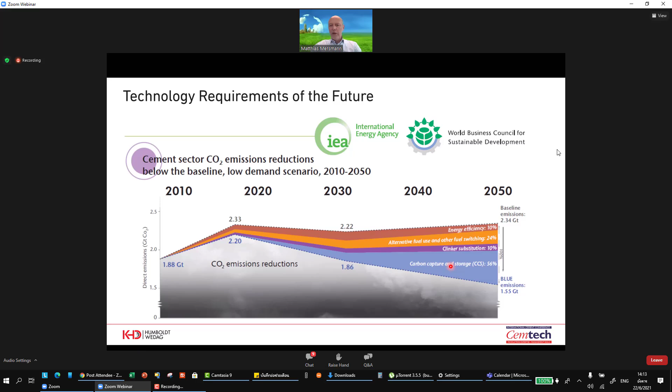To give another aspect on this subject matter, I'd like to show another interpretation from another party. The On-Field Investment Research Group has also been investigating what would be the most likely response of the multinationals in this decade. With all the multitude of technological options in hand, the question is, what are they going to do as first steps?

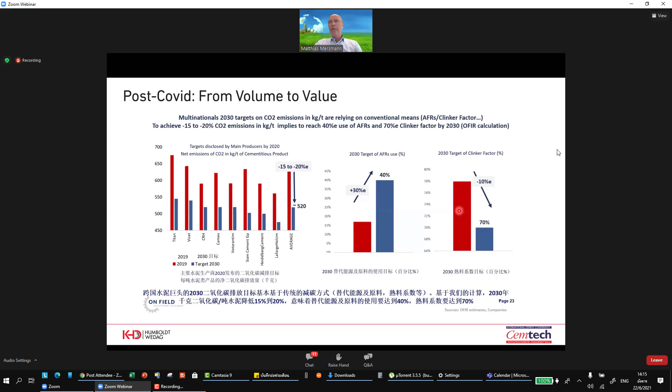The result of this group's analysis was clearly that most cement producers will focus on two things first: increasing the use of alternative fuels massively, and reducing the amount of clinker in cement. These are two very short-term achievable levers to reduce production costs and CO2 emissions. That's why I'd like to focus today on these two levers, because I believe this can be very attractive to get going towards the low carbon industry.

So my first subject will deal with alternative fuel technologies, and as I said, it is nicely scalable. Alternative fuel utilization requires, first of all, the suitable burning and firing technology. So we address subjects like burners, and as shown in this case, the kiln burner can provide a good contribution to an increased alternative fuel firing rate.

For that, the burner needs to be designed, or its design adapted, to be able to burn lumpy secondary fuels and provide enough mixing for them to be ignited. The burner design also needs to be adapted for oxygen enrichment and hydrogen enrichment, which will be coming up as alternative low carbon fuels, and also to facilitate the burnout of lumpy, hard-to-ignite fuels.

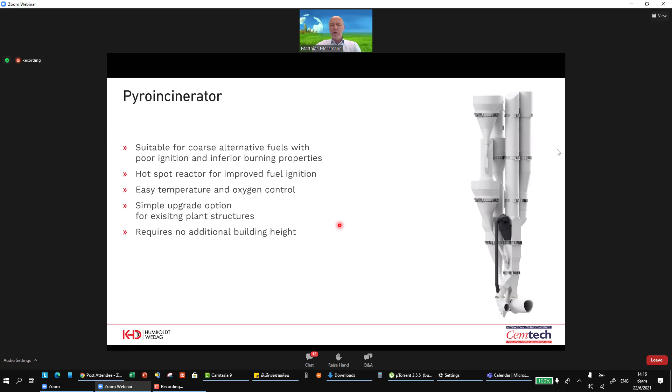What you see here is the latest design of the KHD Pyrojet burner, which can be retrofitted very easily into each and every kiln. Taking it a step further, I'd like to introduce what we call the pyro incinerator, a modular system. You see that dark gray box attached to the calciner, a modular bolt-on system to provide incineration facilitation for hard-to-ignite fuels.

You can imagine that if you start using RDF or other lumpy fuels, you need to help incineration and ignition. This is an easy flange-on, retrofittable module to increase your RDF feeding rate in the calciner.

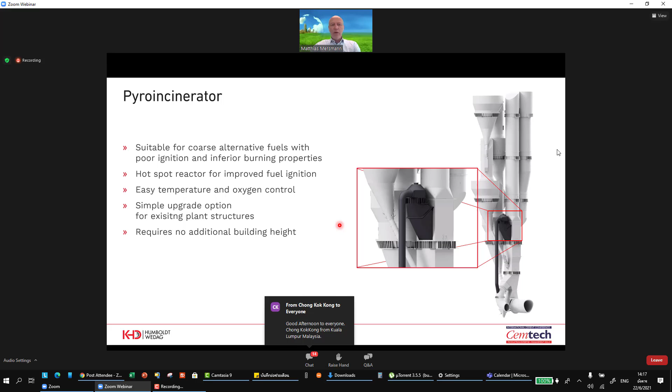Next is the well-known combustion chamber. I guess I don't have to spend much time explaining this — it's a device already commonly known in the process industry, in the cement industry. It takes the utilization of lumpy secondary fuels one step further with a dedicated burner on top of the combustion chamber, also retrofittable to a number of calciner and clinker production plants.

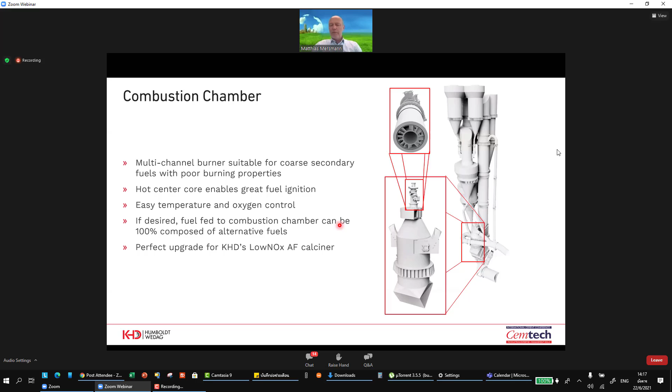What I want to put your special focus on is a new technology we developed in recent years, a system we call PyroRotor. The PyroRotor consists of a rotating kiln sitting on top of the clinker kiln, providing the most robust and most versatile type of AFR reactor available for the cement industry.

The concept of the rotating kiln comes with a lot of benefits. First, there is constant movement of the material inside the kiln, which avoids clogging and blocking. At the same time, it provides new surface for the oxidization and burnout of the secondary fuel inside the rotor. It's most robust, tried and proven, and suitable especially for material with poor burning properties, very coarse and low pre-processed fuels. Even whole tires can be burnt in this.

If we look at the CO2 aspect, we're dealing with biogenic fuels. Biogenic fuels often come with a lot of humidity, are very slow to burn, very slow to ignite, and need a long retention time. If we talk about wood, for example, retention time in this PyroRotor can be very long. The rotational speed can be adapted according to requirements, so this is a very versatile device.

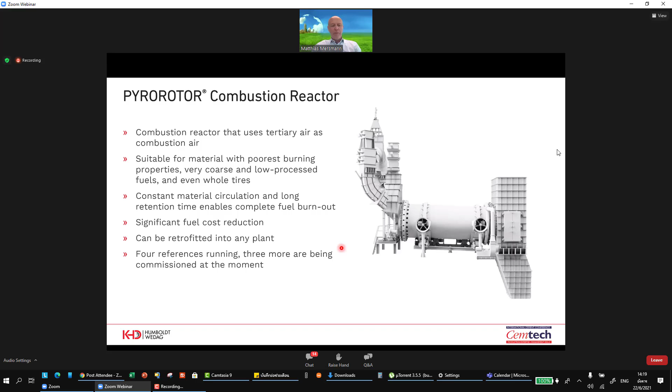Which I'd like to show you in a little animation. I hope we get this going. I hope you can see this now.

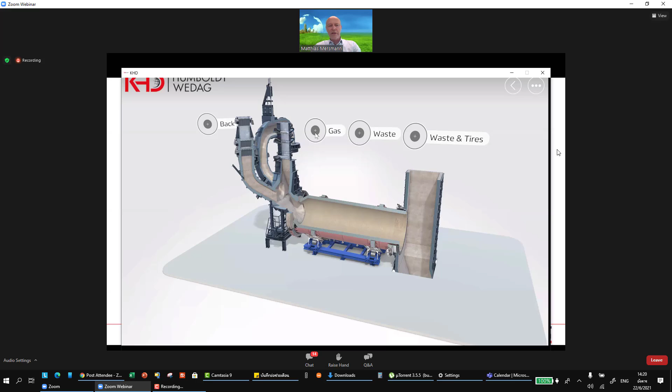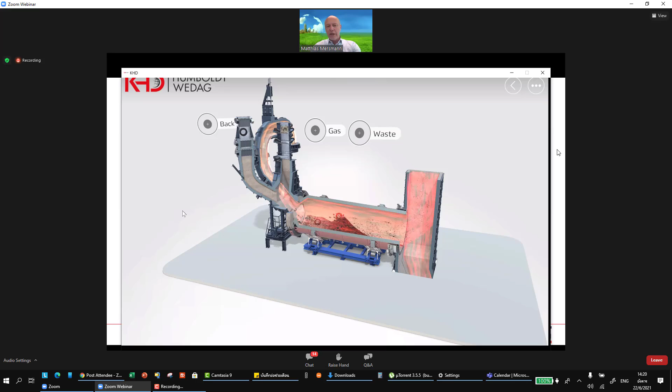You see the airflow coming from the tertiary air through the PyroRotor. And if I now start feeding material into it, you see that the alternative fuel forms a layer in the rotation, in the rotating kiln, with constant surface renewal that makes the material accessible for the combustion.

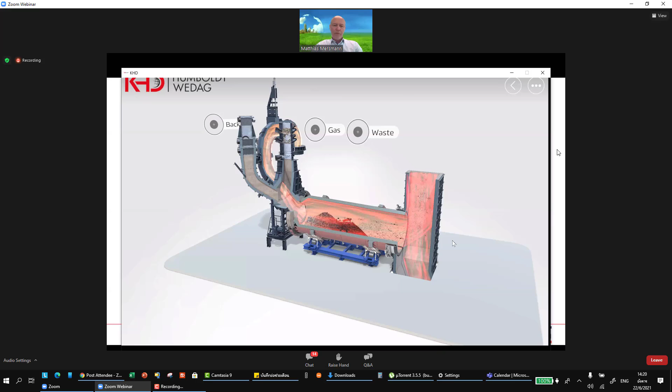And in the end, the off gases are being mixed into the calciner riser, so that in total we have a flow sheet of this system, like to be seen here.

We branch off a little bit of tertiary air guided through the PyroRotor. We can set the lambda value according to requirements. We can run the PyroRotor in reducing atmosphere, so to create also a beneficial reducing atmosphere that is reducing the kiln-produced NOx as we travel down the calciner into a mixing chamber to have the residual burnout of CO, and then come into the preheater with a totally burnt-out, NOx-reduced gas.

The amount of coarse secondary fuel to be fed into this PyroRotor is exceptionally high. We have several references installed meanwhile with substitution rates up to 100% of calciner fuel, consisting of lumpy material—I talk about 3D size, 300 millimeter rubber pieces—so very coarse material that requires only a minimum amount of pre-processing.

And that's especially interesting for regions like Asia, where there is not yet any really established scene and environment of RDF processes, so that you can take municipal waste and pre-process it only to a very minimum amount and then feed it into the PyroRotor.

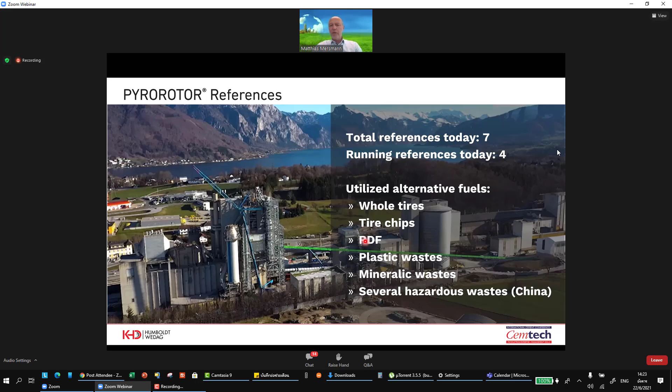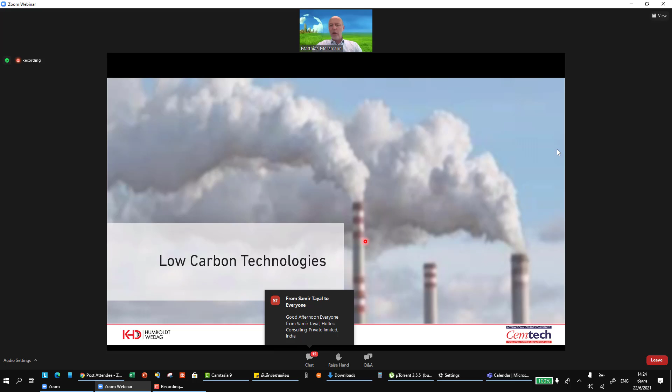Now I'd like to switch over to the so-called low carbon technologies, which is generally a subject that seems to be a little bit further away on the time arrow, but as experience tells, the large cement producing groups already run their pilot projects on these low carbon technologies. And I feel this movement towards low carbon technologies coming to us much faster even than I expected it a year ago. So we are working, like everybody in the industry I assume, already very concretely on pilot projects on various kinds of technologies for the low carbon future of the cement industry.

The two subjects I'd like to mention here in today's presentation refer to CCS and oxy-fuel plants, or I should rather say CCUS and oxy-fuel plants, which cover the subject of end-of-the-pipe carbon capture technologies, but also integrated concepts like oxy-fuel processes, which run the clinker production process without the usage of air, but recirculated or in any case oxygen-enriched gas as a combusting agent.

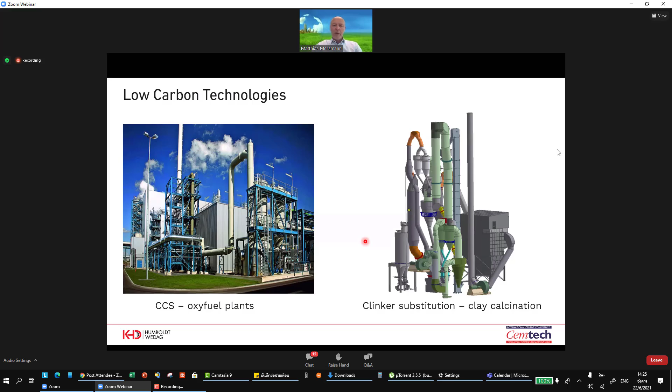And the second subject would be referring to the target of clinker substitution, and a widely used approach here is that of clay calcination. Let me start with clay calcination here with an outlook, or with a deposit map for clay.

We see that the kaolin deposits, which are necessary for using clay calcination as a technology to produce an SCM from calcined clay, are very plentiful also in the Asian region, where there are huge deposits of kaolinite, which is necessary. So that might be a very interesting technology for especially the Asian region to reduce their clinker factor and produce calcined clay and mix it into cement.

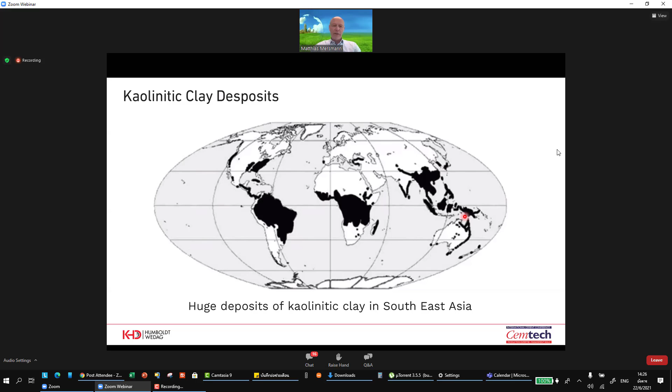And for this reason, we have developed technology for clay calcination, which I'd like to briefly introduce to you.

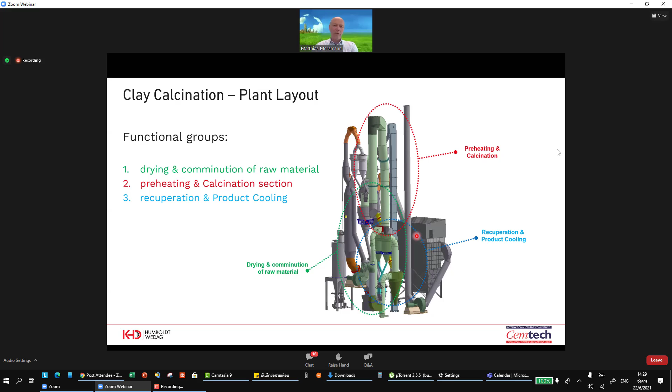As a special feature, we have developed a specific two-stage process with optimized oxygen staging, which provides for color control and optimized heat utilization. This is necessary because if you don't control the oxygen content during the calcination, you will have a non-gray product, and in the cement industry we just like the color gray. With this it's possible to control the oxygen content and with that to control the color.

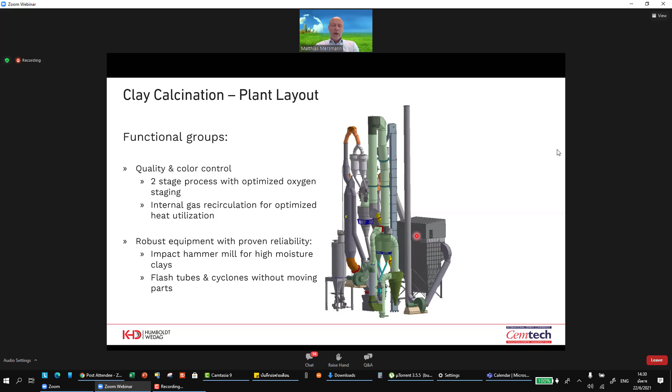As the last point of technology I'd like to mention today, I'd like to give a little bit of information on CCUS and oxy-fuel plants. I guess the subject of carbon capture as a bolt-on, end-of-the-pipe amine scrubbing technology is well known to everybody. It's something you just flange on at the end of the process. A well-known technology that is already available.

What is more interesting, because it's more energy efficient and because it's reducing costs also on the carbon capture side, is to run cement plants as oxy-fuel plants. Oxy-fuel means that you don't use air for the combustion, but you use an oxygen-enriched gas.

I guess we're going to hear from ThyssenKrupp already about their proposal on their oxy-fuel process as well. But what I'm showing here is something like a classical, very flexible oxy-fuel flow sheet.

You see the preheater and the precalciner, the rotary kiln and the cooler as the core of the clinker production process. And what's different from a regular process is that you take the off gas of the preheater, do some energy recovery, but in the end recycle it and bring it back into the cooler and add some oxygen to it.

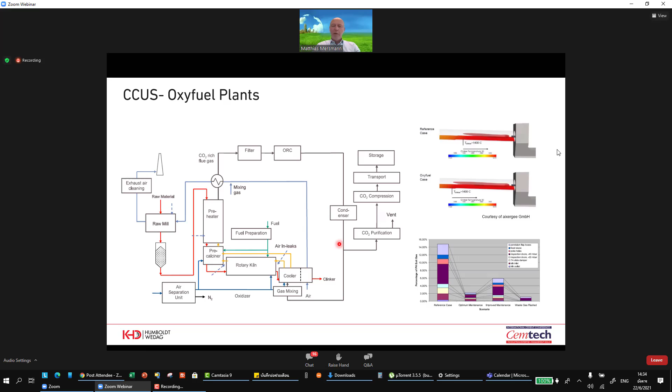during this very interesting period of time that's coming up to us so rapidly. I think we have to get all our brains together, everybody, and cooperate across the sectors and across the desks in order to manage to respond correctly to this requirement, to this challenge. So let's get things done together. We will be happy to cooperate with you.

Thank you very much, Matthias.

That's a really interesting presentation. You've kind of touched all the main themes there. We've looked at alternative fuels, the clinker substitution, and now the CCUS, as you say. There's so much technological development now. Some of it's in really quite early development, and some of it is literally on the cusp of being installed for the first time in cement plants.

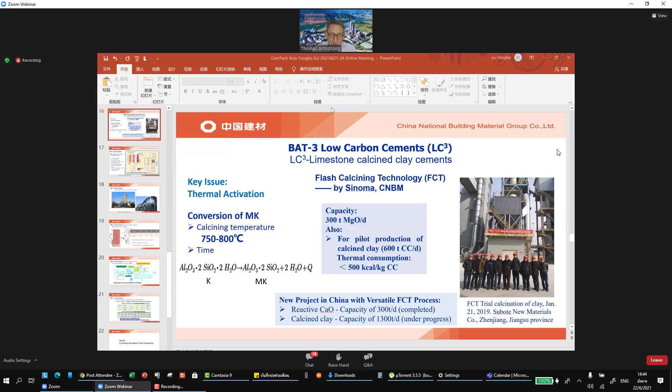Thank you, Thomas. Thank you for the kind introduction. Good morning, good afternoon, colleagues. I really appreciate the conference organizer inviting me to attend this important conference. I'm not quite sure if the slides are good or not.

Yeah, we can see them, but if you would like to put it into presentation mode, in the bottom right you could press the icon which will show the slides. Just a moment, sorry. We can see them.

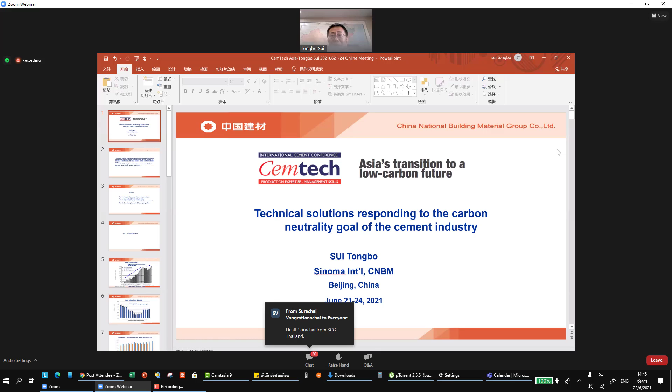Today I'm very happy to share with you the technical solutions responding to the carbon neutrality goal of the Chinese cement industry. This is also the effort of the Chinese cement industry to respond to the statement our President Xi Jinping made last year in September, that we aim to have CO2 emissions peak before 2030 and achieve carbon neutrality before 2060.

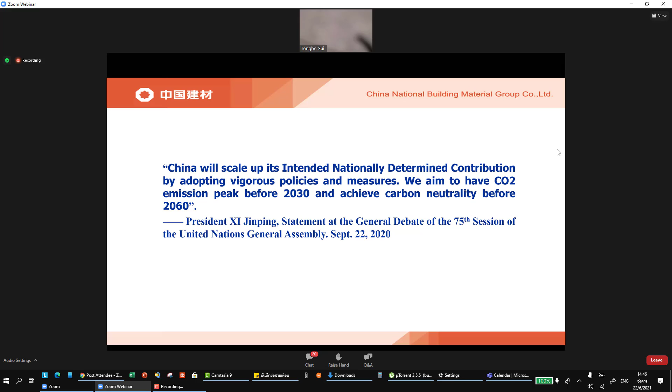Today my presentation will mainly include three parts. First, a quick review of the current situation of the Chinese cement industry. As we know, China is producing more than half of the cement in the world. We have seen, in the last 50 years, a dynamic increase of Chinese cement production.

The highest production output actually happened in 2014. Then the cement industry of China experienced a steady decrease, though there's some up and down, but we have seen that we are now in the phase of decreasing production amount.

But even so, when we look at the figures of per capita yearly consumption of cement, we are still very high, 1.66 tons per capita. Also, in terms of CO2 emissions from the cement industry, we account for around 13% of CO2 emissions in China.

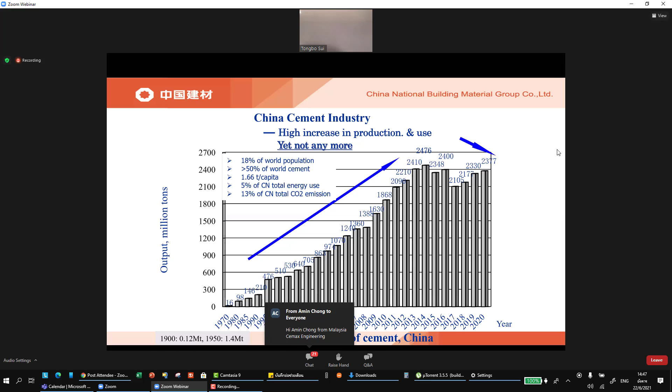Another characteristic of Chinese cement is the higher ratio of clinker substitution. Clinker substitution can give an immediate effect for CO2 emission mitigation. We have seen the lowest clinker factor of Chinese cement around 2014, and in the recent 3-4 years there's been a little increase in the clinker factor in Chinese cement.

But that doesn't mean we use more clinker in the concrete. What we don't use in cement production, we can also use for concrete. So it's more or less the same effect in terms of CO2 emission per cubic meter of concrete.

We know that CO2 emission, especially direct CO2 emission, is closely associated with clinker output. Here it shows the diagram of the Chinese cement industry for clinker output and direct CO2 emission. We have seen a little increase in recent years, more or less 1.3 billion metric tons of direct CO2 emission from Chinese cement. That's a huge amount, and a huge challenge for the Chinese cement industry in the future, especially regarding carbon neutrality by 2050 up to 2060.

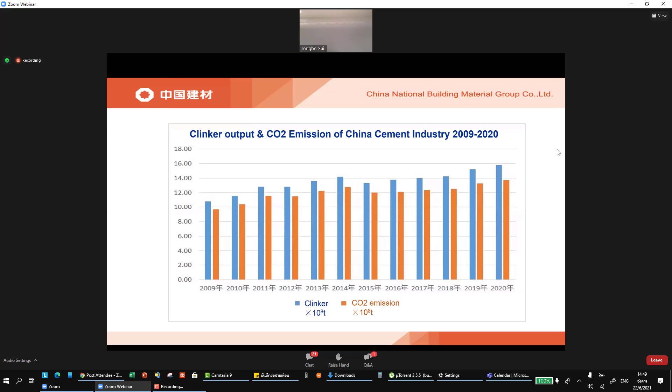In the second part, I will give you some examples of best available technologies and emerging technologies in China contributing to cement sustainability and carbon neutrality.

Following the same principle of the technical roadmap for low carbon cement launched by the IEA and the former CSI, we have best available technologies in China for continuous improvement of energy efficiency, thermal energy efficiency, as well as power efficiency. We also have more than 80% of Chinese facilities equipped with waste heat recovery systems.

The second part covers best available technology for alternative fuels and raw materials. Mostly we focus on co-processing different wastes, for example municipal solid waste, hazardous waste, and sewage sludge. So far we have equipped close to 100 facilities to deal with these different wastes. Unfortunately, the percentage of co-processing using alternative fuels is very low, around 2%.

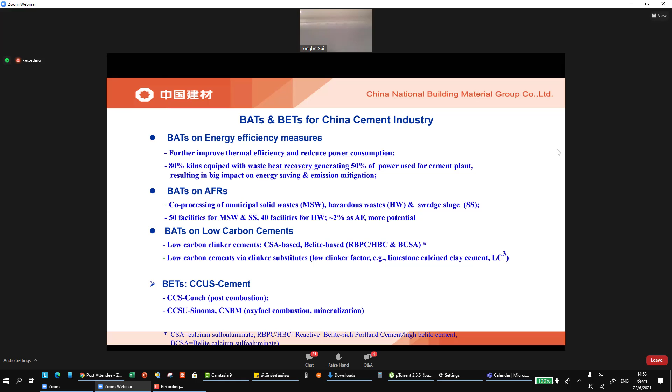The first example I wish to present is the demonstration project with AI-aided modern manufacturing technology. The project is located near Hangzhou, at CNBM cement. It's a new dry process with 6-stage facilities, capacity of 7,500 tons per day, generating 30 kilowatt hours from the waste heat recovery power generation system per ton of clinker. With the modification of the AI system, we built the cement facilities with less than 65 staff, and achieved a number of advanced KPIs, for example thermal consumption, power consumption, and also pollution control parameters are very good.

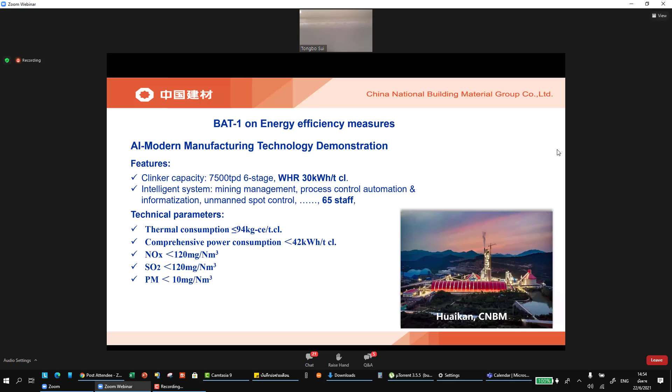A second example I want to give is for co-processing. This shows the first co-processing project we did in China, by Sinoma, in Liyang City, with a population of less than 1 million. With this system, we co-process 450 tons of municipal solid waste and 120 tons of sewage sludge per day, and 20 kilotons of hazardous waste per year, combined with a 5,000 ton clinker line. Considerable economic, social, and environmental benefits can be achieved by this co-processing system. The most important thing is that with this co-processing facility, Liyang City actually becomes a city with zero municipal solid waste. In recent years, this has become a trend, a new mode for combining cement co-processing facilities with zero waste cities. We have quite a few projects already completed in China with this combination.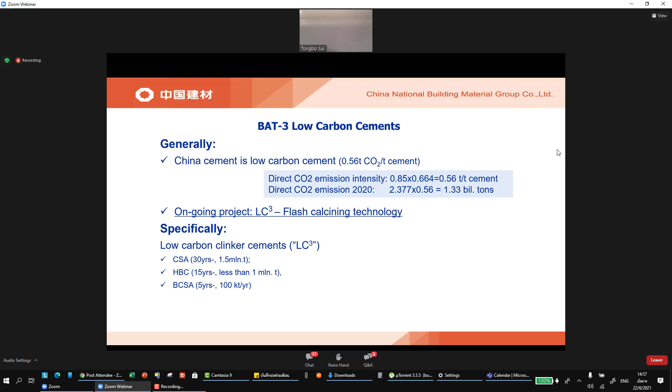Specifically with Chinese characteristics, as I already mentioned, we have developed and utilized low carbon clinker cement with CSA or belite as principal minerals. I believe this kind of low carbon clinker cement will also be a very good alternative in the future, as an innovative material solution for the future cement industry.

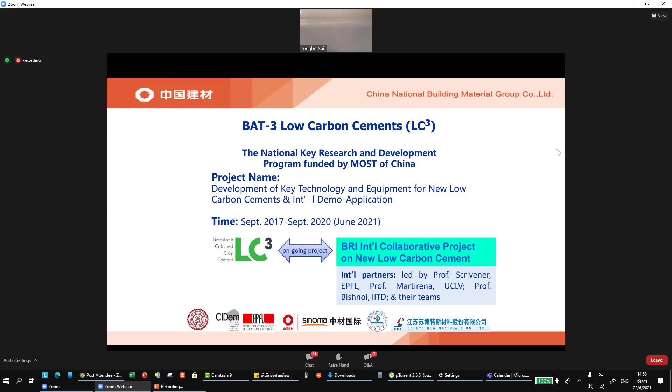I also wish to say a few words about the national project we are doing now in China, supported by the Ministry of Science and Technology of China. The project is an international collaborative project. We appreciate the international partners, led by Professor Karen Scrivener from EPFL, Professor Martirena from Cuba, and Professor Bishnoi from India. With this collaboration, we have 6 partners working on this new low carbon cement, focusing on using calcined clay. This is the new type of low carbon cement we are working on.

We expect this low carbon cement can use a 50% clinker factor. But even with 45% clinker replacement, we expect to achieve equivalent 28-day strength compared with pure Portland cement, without any addition of blending materials. The new low carbon cement can also exhibit excellent durability.

The second important milestone for this project is to develop suspension calcination technology, a kind of flash calcining system. We expect this system to produce calcined clay more energy efficiently. We have also demonstrated the project outcome through trial production of calcined clay, with 600 tons per day of calcined clay in the system.

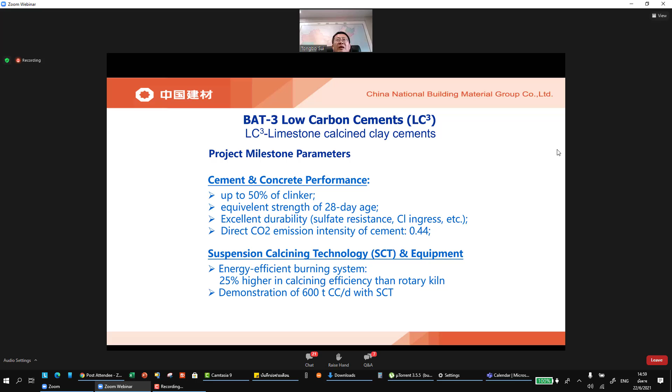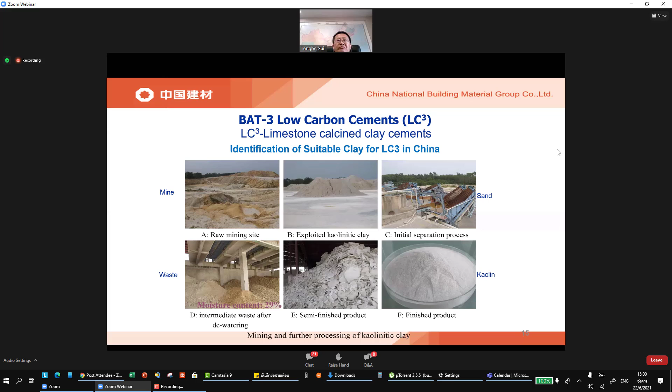The raw material we identified in China is a kind of intermediate waste from the beneficiation process of kaolinite in southern China, where a lot of such silicate-rich soft kaolinite clay can be found. The key issue for LC3 is to thermally activate the clay. The best performance is given by kaolinite-bearing clay raw materials, with calcination temperature around 700 up to 800 degrees, depending on the time and the kaolinite content.

Research shows that 40% kaolinite content in raw clay is good enough for producing high quality, low clinker factor, low carbon cement. Certainly, the higher the kaolinite content, the better the performance, and the larger the replacement of clinker for production of low carbon cement.

We successfully made a trial production of kaolinite clay using the flash calcining system we designed for our Chinese client, Sobute New Materials Company, in Zhenjiang, Jiangsu province. We made this trial production two years ago.

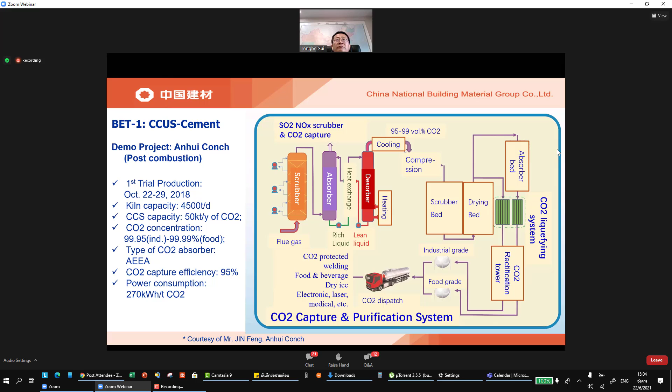So we see the flow diagram of the post-combustion system for the Anhui Conch demonstration project. We also show two pictures of CCUS projects at Anhui Conch cement.

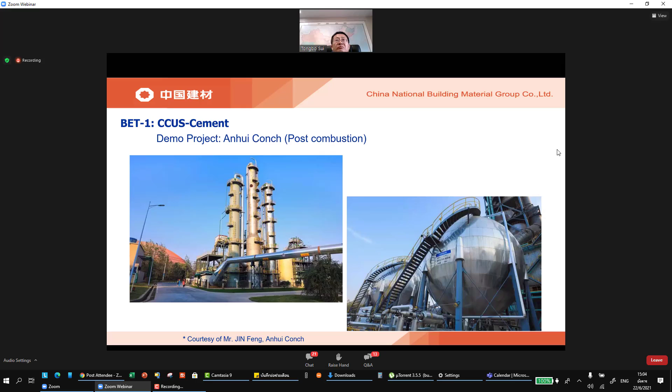For the second CCUS, in China, Sinoma also developed the oxy-fuel and CO2 enrichment process for CCUS technology. With this oxy-fuel process, we expect to concentrate CO2 from normally 20-30% up to 70-75%.

With the enrichment of CO2, we expect to considerably reduce the capex and opex of the CCUS system. Another important point is that with CO2 enrichment up to 75% concentration, we can use the CO2 enriched gas directly for carbonation curing to produce carbon cured products. With that, we can reduce the cost remarkably.

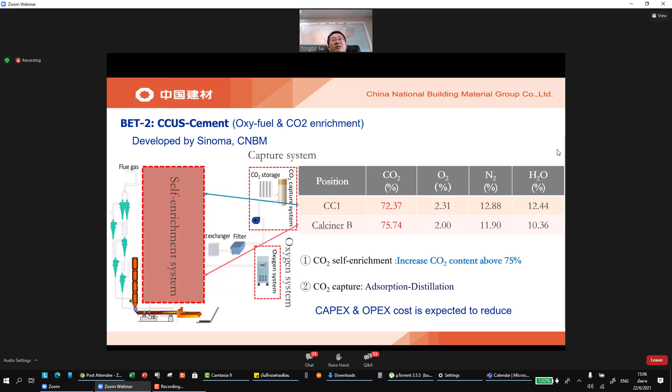Here's a flow chart of the oxy-fuel combustion system Sinoma developed. We already finished the 50,000 tons per year pilot project. We are expecting to work with interested industry partners, cement partners, on the oxy-fuel combustion project.

We are also involved in CCU, utilization through the mineralization sequestration process. The concept is very simple: we try to use two types of waste, CO2 from flue gas and carbide slag, also a kind of waste from the chemical industry, to produce the high value added product PCC.

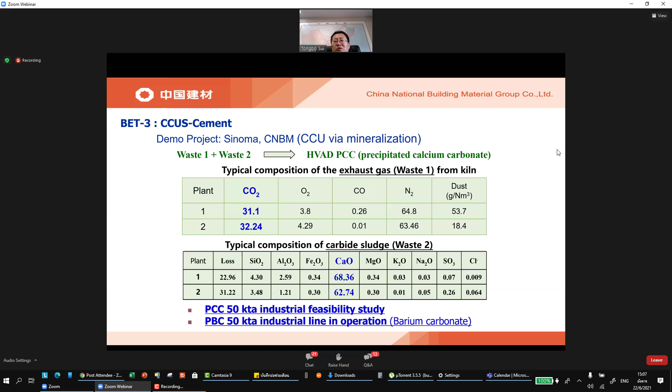Precipitated calcium carbonate - we already finished the feasibility study for the 50,000 tons per year PCC, and we also completed the industrial project to produce precipitated barium carbonate with the same capacity, 50,000 tons per year. Though this mineralization process capacity for using CO2 is very small, only 50,000 tons per year, I believe this is a very important step to take action from now.

Finally, a few words about the future perspective. In terms of cement sustainability and carbon neutrality, this is a global issue but has to be dealt with regionally. We rely on all aspects to contribute to this sustainability and neutrality. There's no silver bullet - we have to equip ourselves with different tools in our toolbox to respond to sustainability and carbon neutrality in the future. CCUS is certainly one of the key solutions for carbon neutrality.

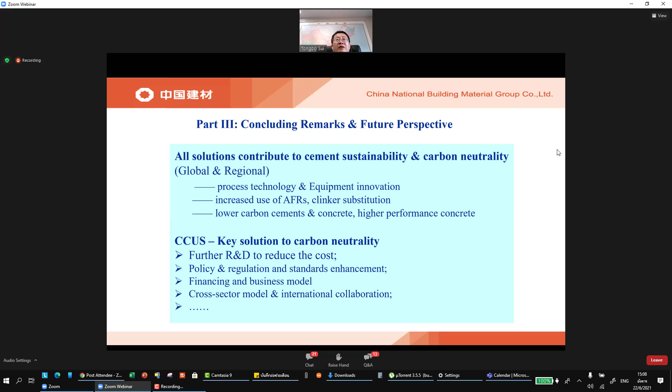With that, we expect further R&D to reduce considerably the cost for capex and opex. We also need support from policy regulation enforcement, standardization, financing, and cross-border, cross-sector business models, and international collaboration. I also wish to use a slide that I prepared 10 years ago.

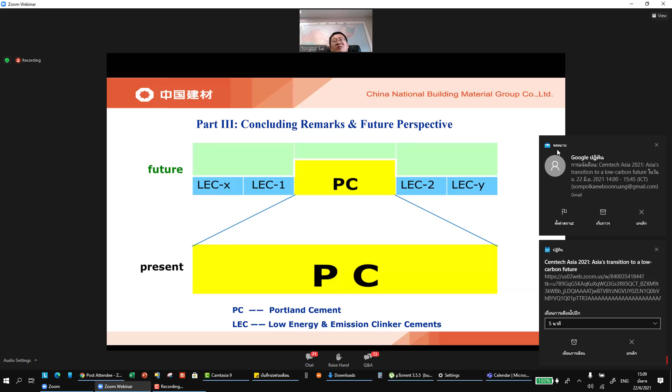I believe that's the scenario in the future for cement as a binder - to change the present Portland cement as a single material, and produce more low energy emission clinker cement combined with the main dish, the Portland cement, in the future. That's my short review of the Chinese solution in responding to carbon neutrality.

Thank you very much. Thank you very much.

That was a fascinating presentation, interesting to see the alternative fuel solutions, calcined clays, carbon capture, different technological approaches in different environments. In China, the scale of the industry is immense - as you mentioned, over half the world's cement production.

With these technologies now developed but still at an early stage, how fast do you think they can be adopted by the cement industry in China? Are the drivers there to push this technological deployment? I'm thinking about the 5-year plan and peak carbon as one of the targets - do you think that's going to push this technology quite fast? Thinking back 15 years ago in China, the vertical shaft kiln was still the dominant form of manufacturing, and now it's completely eliminated. We know how fast China can move - do you see the same progression for these low carbon technologies?

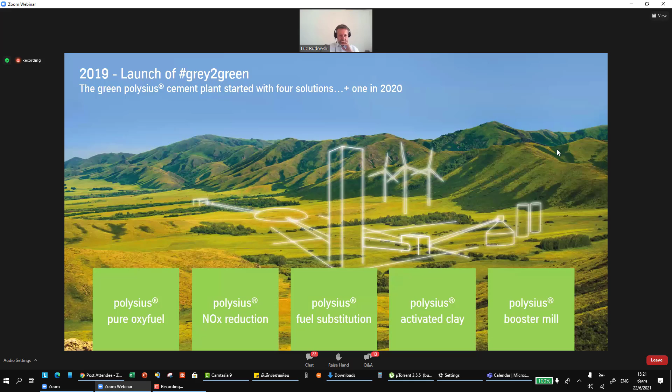Let's start with the fuel substitution. I think most of the previous speakers talked about what is, until 2030, the win-win solution. Most of it's related to win-win because it's not increasing the cost of the cement that is produced, but on the contrary, the cement producer can reduce their production costs and earn money with a very rapid return on investment using waste fuel, alternative fuel, as well as clinker substitution. So let's start with the fuel substitution.

We developed this combustion chamber, the so-called Prepol SC, and the short version of it, the Prepol SCS. We have had a lot of references on that for years. Basically, that's a completely static combustion chamber where, on the Prepol SC, you have a tertiary air duct as well as a meal, in order to have a complete combustion of ultra coarse fuels or very low reactivity fuels, aiming at a complete substitution in the calciner. Basically, the two systems use the same feeding system here.

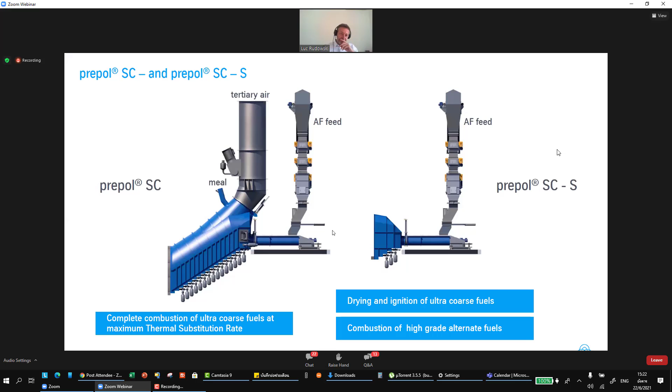The difference with the Prepol SC is the size of the combustion chamber, which is used to dry and ignite the coarse fuel. It's not completely burning, but it's creating a lot of volatile matter that will then continue to burn into the calciner. This is a perfect entry product to start burning alternative fuel.

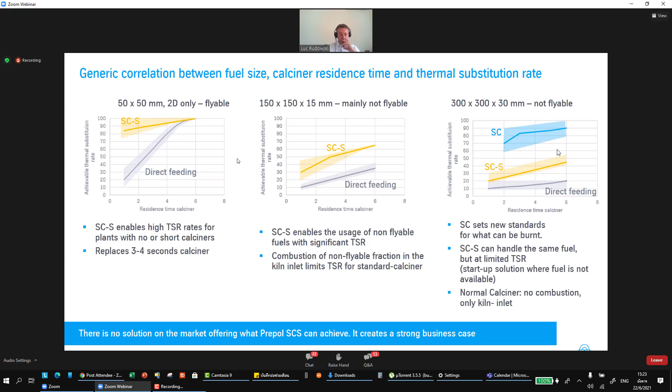Going to larger pieces of alternative fuel, you can go to the SC combustor. So with these two solutions, we have the complete range of possible substitution rates with any kind of size of alternative fuel.

The SCS has been commissioned last year, very quickly and successfully, in Cementos Artigas in Uruguay, leading to a 25% TSR over the Prepol SC. The nickname in South America has already been launched by the client - the so-called Prepolito. There they are burning shredded tires.

And we just commissioned the second one in Turkey, on the separate line calciner, which is quite interesting because it's not that easy to burn alternative fuel in a separate line calciner. So this product is having a great start on the market.

Here is a major reference that we are implementing presently for TPI Polene in Thailand, where the client has 4 9,000 tons per day plant, and we are converting the 4 kilns with Prepol SC, leading to the biggest waste incineration plant in a cement plant.

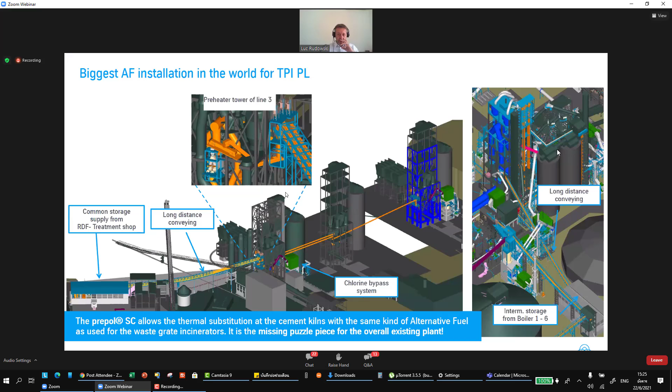Together with the chlorine bypass system as well, so we developed the waste to energy solution for household waste. Yesterday we had the presentation of Cemtech, so I guess that's really a good continuation in terms of technology proposal to solve the problem of household waste and plastic - from the collection, sorting, treatment, and burning that in our combustion chamber, Prepol SC or Prepol SCS.

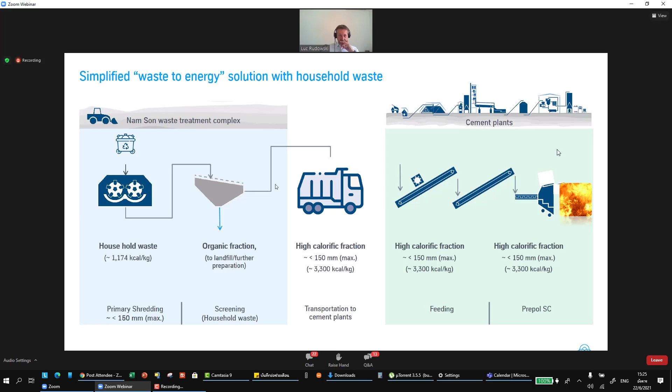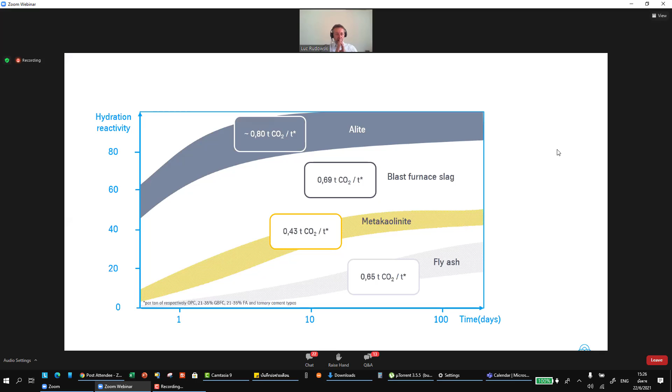Clinker factor reduction: in fact we are combining here two technologies, because we believe, as it was presented by Paul Roger from Exxon yesterday, that with decarbonated clinker and LC3 type cement, that is the best combination we can have in the future in terms of production cost of clinker. We believe as well that the clinker will remain, and the graph here is to explain why.

Even if the challenge of the alite here - representing the clinker - is that it's emitting the highest amount of CO2 and is most energy demanding when compared to a possible alternative like blast furnace slag or fly ash, which everybody knows has less resource available. Metakaolinite is an option, definitely, but still the alite is showing the strongest hydration and reactivity over time.

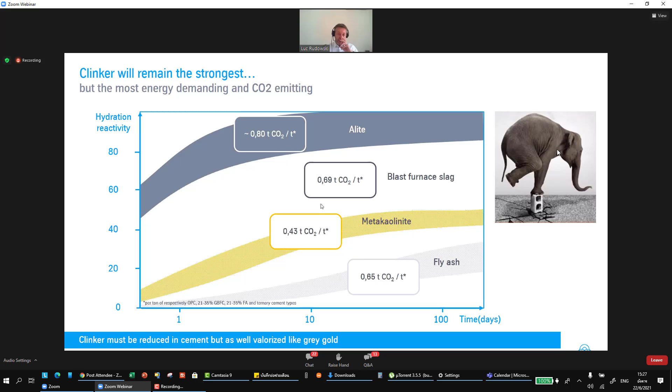So that means the consequence is that we will have to reduce the clinker, but the remaining portion of clinker in cement will have to be valorized. I use this term of gray gold because it will remain in the cement industry. So our proposal, in fact, is to combine both technologies here.

First of all, what we call the Polysius activated clay, which is a flash calciner producing activated clay as a substitute for reactivity from the clinker. And on the other side, to optimize the reactivity of the remaining part of the clinker, which can be used either to push further the clinker reduction factor when using activated clay, or to add more filler if we are talking about limestone additive there.

So in fact, it's the compensation of the missing clinker reactivity by activated clay that we know at the early ages as well - I mean the booster mill here can offer definitely earlier compensated strengths with finer clinker grinding.

Let me explain a bit the principle of the technology. I will not enter into very detail because I would like to cover all possible topics that we are developing, and we have a lot under development in our portfolio right now.

So I'm presenting here the flash calciner. I think that's quite an industry, becoming an industry standard.

I have still a lot of questions about rotary kiln. For sure, there are some rotary kilns producing activated clay worldwide. This is an option for me as well for existing kilns that are not producing, because that would definitely be the lowest capex.

But let's say the flash calciner has been selected by us as a favored technology for two reasons. First of all, there is no capex advantage in the rotary kiln, and there is a strong product quality advantage for the flash calciner, both in terms of activation, color control, and especially the flexibility of using a range of different fuels, from fossil fuels to renewable fuels.

So basically, the treatment of the clay depends on the type of clay, because using a very high kaolinite content is a piece of cake, I would say, in terms of activation, low heat energy demand, etc. But in general, the challenge is to use clay that are available in cement plant deposits where the kaolinite content is just good enough, with high iron content, and then the necessity to get a gray color - this is the challenge.

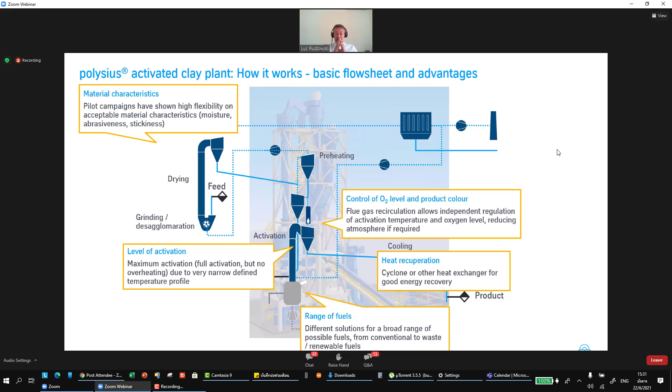We are still making a lot of innovation and development of the product right away in R&D with various clients, and we offer for your project of developing activated clay plants a full range of services: geology survey, raw material analysis, chemical, physical, etc., flash calcining including color reduction tests in our labs, mortar testing down to cement classification, and the overall business case evaluation.

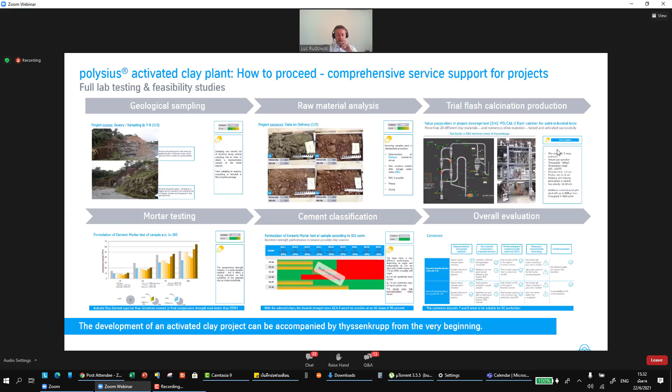And well, I can tell you that activated clay is a booming product. There is a lot of interest worldwide, and now we are turning into concrete projects. So we have been lucky, but also convincing enough to sign the first worldwide standalone flash calciner system in Cameroon for Cimpor International, which is Oyak Group.

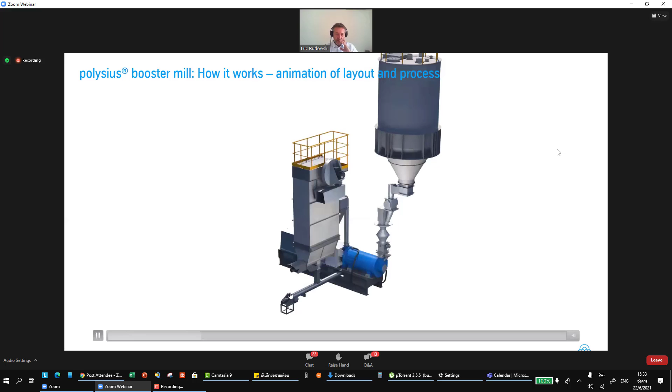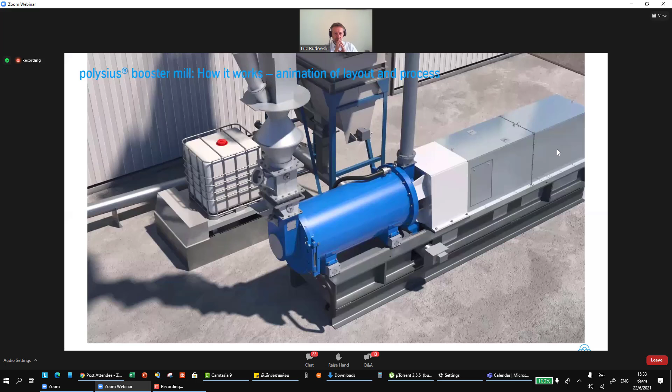So this mill is very well known in chemical industry, cosmetic, food, as well as mining, but this is the first introduction in the cement industry. As you can see, it's a small chamber with rotating grinding discs there.

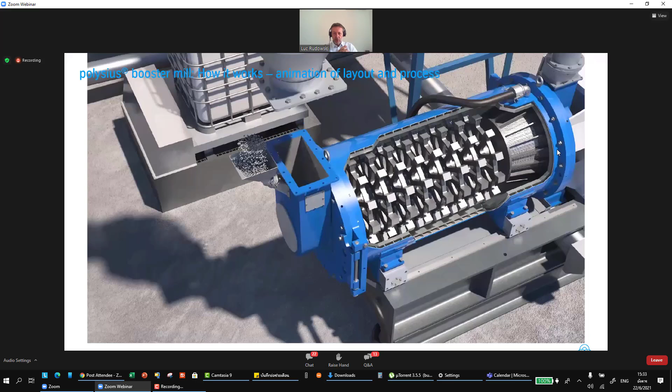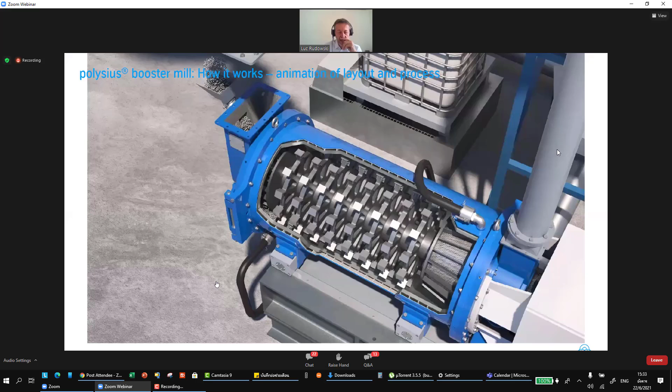So here we are on the small velocity with feeding of the beads, these very small 6 to 8 millimeter balls here. So the velocity is quite small. So you have this grinding chamber, and you have at the outlet a trommel to separate the beads from the material. And when we feed the material, then the velocity of the grinding ring is accelerating, with a very high energy density - the power to volume ratio compared to a ball mill is 10 times higher. So you can imagine the grinding efficiency of such a system is extremely good.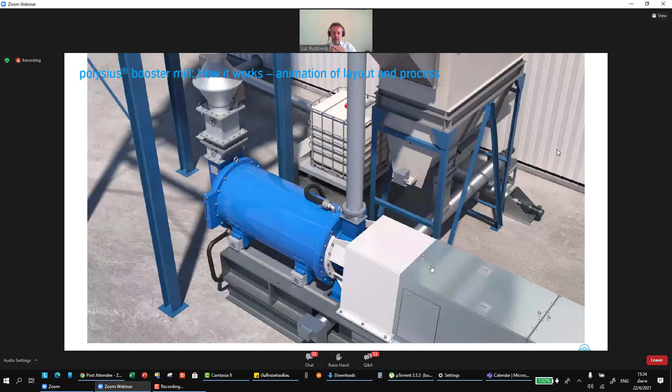How is it used? Let me switch to the other slide. So for the time being, we are developing the system, and a first reference has been commissioned 2 years ago already in Turkey within an existing ball mill circuit.

So we are developing this technology on ball mill circuits because there is a lot of potential in terms of improvement still. The system, as you can see, the booster mill with the feeding system, can be fed either by the product outside the bucket elevator, mill outlet, or from rejects from the separator. And the objective is to get a feeding granulometry of incoming the mill of about less than 500 microns, or 0.5 millimeters.

It's a kind of separate grinding, a third chamber of a ball mill, whatever you want to call it. Because with limestone cement, the clinker percentage within the separator reject is increased - instead of 75% clinker, it goes up to more than 85%, since it's harder than the limestone already in the finished product. So you can preferably work on grinding the clinker separately. That's the advantage of the machine.

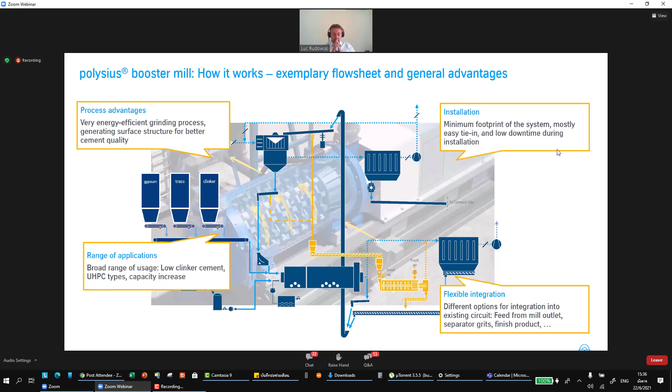And that's the objective of reducing the clinker factor. So we have been conducting a lot of tests, and I'll come to the results in a minute. Since the commissioning of our lab booster mill, shown here on screen, since August 2020, we've finished 6 campaigns with 4 more underway. The machine is occupied every week - we have a lot of collaboration with clients and see strong interest in the market.

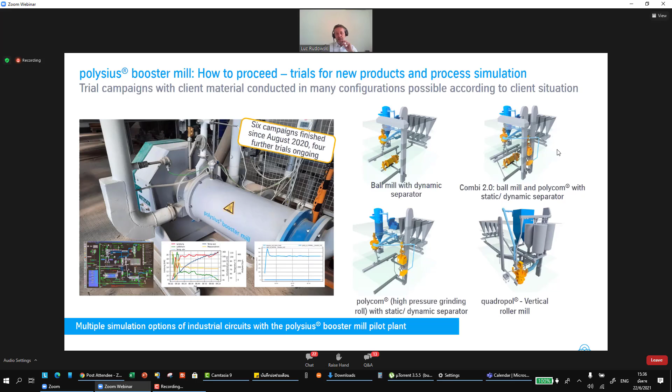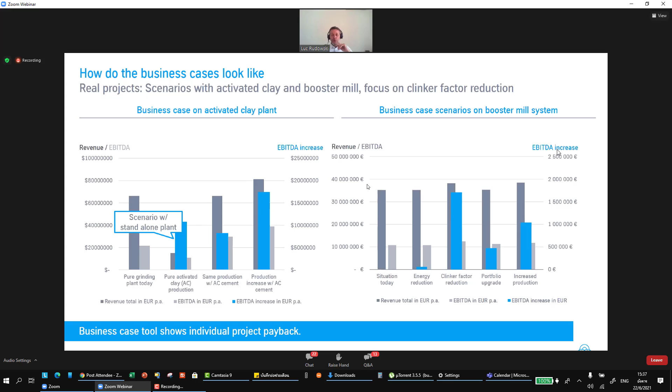For both technologies, the business case is extremely strong when you come to high-cost clinker, which will definitely happen in the future, because if we want to reduce the CO2 footprint of the cement industry, the next generation of technology is supposed to arrive after 2030 - though personally I believe it will be earlier, especially in countries or regions where an ETS system is applied.

You may have seen that in May of this year, the CO2 price in Europe was as high as 53 euros, and when you touch 60 euros, this new technology of carbon capture becomes applicable. I see an urgency, in fact, to be ready to develop this technology even before it's required.

So we have been doing that for many years already. We have been involved in many R&D and innovation projects comparing different technologies. This is one outcome of a CEMCAP study financed by the EU, where we compared MEA scrubbing technologies - presented by my predecessor this morning - chilled ammonia process, carbonate looping, oxy-fuel, and indirect heating. The study shows that oxy-fuel has the best potential in terms of CapEx, OpEx, and total cost of ownership.

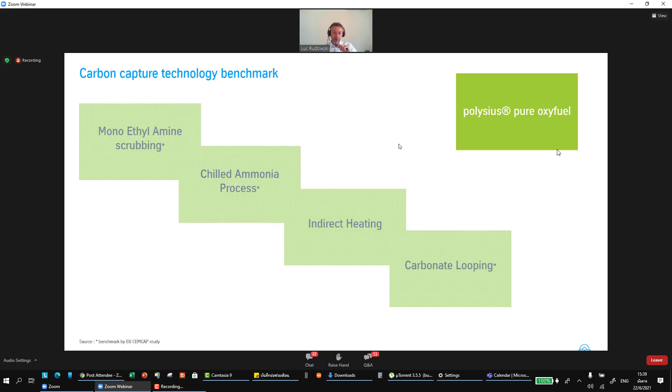That's why we put all our efforts into developing oxy-fuel as our favorite technology first, but secondly, we invented our own oxy-fuel. What was presented this morning was actually a first generation oxy-fuel, shown on screen right now. So what is the difference between the first and second generation? That's our process, also called polysius pure oxy-fuel.

In the first generation oxy-fuel, you replace the nitrogen from the air - we replace combustion of the fuel with air by a mix of oxygen and recirculated CO2 captured at the outlet of the kiln, here in the first part of the cooler. For that, you need a heat exchanger to recover the heat needed for drying in the raw mill, your raw material. You need to dedust that, and also discharge the water before recirculating and before sending it to CO2 purification.

What we developed is the pure oxy-fuel - you'll see the separation in the cooler between the first part, where we blow CO2 and oxygen, and the second part, where we blow air. This separation is moved to the first part of the cooler here, because we are no longer recirculating any CO2.

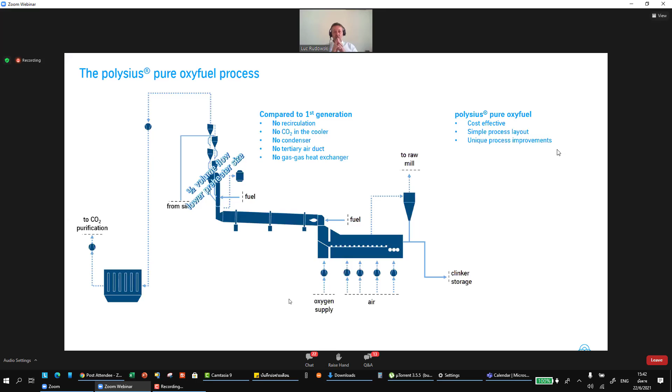That's why we are involved in several pure oxy-fuel projects, and we think we are quite advanced. That's why CI4C, which is a joint venture of four global cement players - Heidelberg Cement, Buzzi Unicem, Schwenk Cement, and Vicat - came to us to consider the use of our pure oxy-fuel technology in their demonstration plant. This is just an image, but we hope that we are quite advanced in terms of development and could launch the construction of such a demonstration plant very shortly.

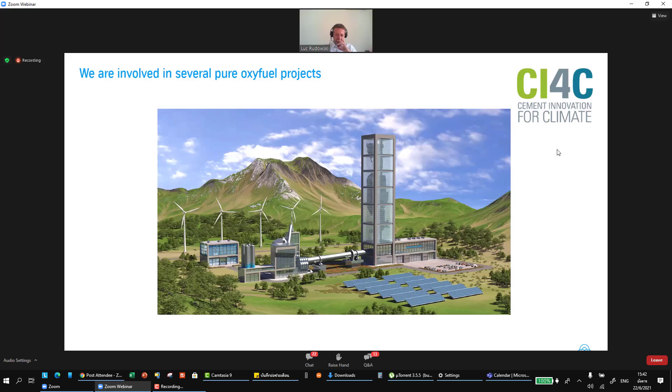The second project I can share, there are many others believe me, is this Westküste project. That's a sector coupling project where an offshore wind producer, a refinery, a cement plant of Lafarge-Holcim in Lägerdorf, and a gas grid connection are launching a carbon capture and usage project. The green energy will generate hydrogen through electrolysis, along with oxygen, which will be used on one hand to generate the pure oxy-fuel process to capture CO2, and on the other hand the hydrogen combines with CO2 into a methanol synthesis to generate green aviation fuel in a refinery.

Definitely we think that CCS, and there is a lot of progress in terms of CO2 infrastructure especially in North Europe, like this Porthos project, Northern Lights, etc. But we believe that if we can create value by generating a usage like green fuel, that will come much more economical, because overall the process of capturing CO2 is very energy demanding.

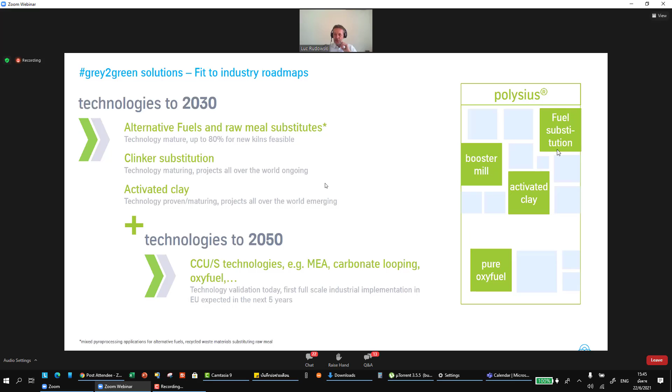As a summary of my presentation, you have seen that in all the decarbonizing roadmaps of the cement players there are two dates, 2030 and 2050. 2030 is, I would say, conventional technology, business as usual, contributing to reduction of clinker costs. There we are well equipped with our Prepol SC, booster mill, and activated clay for this three-abatement technology for CO2. But we are also quite prepared on the oxy-fuel technology as a carbon capture favorite technology for the next stage. We are working on other projects too, but we want to talk about this technology when we are ready to launch it on the market, and not as possible greenwashing or something. Thank you very much for your attention.

Thank you very much, Luc. Another fantastic presentation, you've covered so much new technology. It's great to see things like the booster mill coming in and bringing in technologies from other industries, the calcined clays as well, and the first facility already under construction in Cameroon.

Various questions. What is the capacity of the calcined clay plant that TKS is currently building? And I guess another question is, can these operate as standalone production facilities and serve maybe a ready mix plant on their own? Is that another possible model for these?

Oh yeah, absolutely. I don't want to make our cement clients angry, but I think there is a lot of interest in the concrete industry as well, which somehow puts cement players in competition with some concrete players that are active with strategic assets on the granulate side, for example. But there is strong interest in the booster mill, as well as in the activated clay standalone plant. There is an interest as well in construction waste material usage into the activated clay plant.